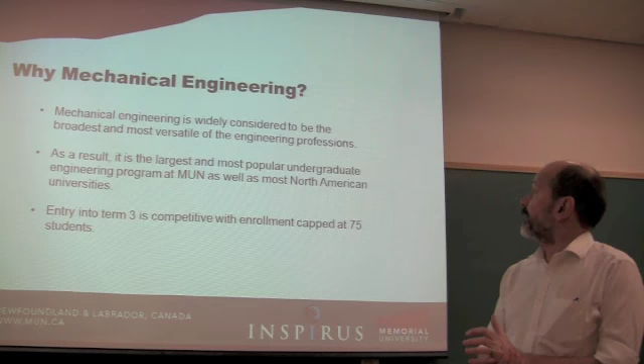So a little bit about mechanical engineering. I think it's a fair statement to say it's usually referred to as the broadest and most versatile program. It covers a number of different areas, and as a result it's the largest program at MUN, the largest engineering program at MUN. It's usually the largest program in most universities, even in the US.

Entrance into term 3, when you complete Engineering 1, is competitive, but we also have the largest cap. We technically cap at 75 students, but usually we go over, so it's about 80 or so. Often the best students come into mechanical - if you look at the top 30 or so, they'll have averages over 80. But because the program is quite large, to get in, it's been sort of in the low 70s, to give you an idea, since somebody's going to ask me that question. But it may change.

So this is what mechanical engineers do, and you'll learn more about this from the various speakers. Again, it's a broad discipline, and a lot of our graduates will work in the energy sector, which is probably the number 1 employer for mechanical engineering students. A lot of the co-ops are in the energy sector, but I'm not necessarily only referring to petroleum and gas - a lot of them will work in renewable energy, wind and hydro, wave.

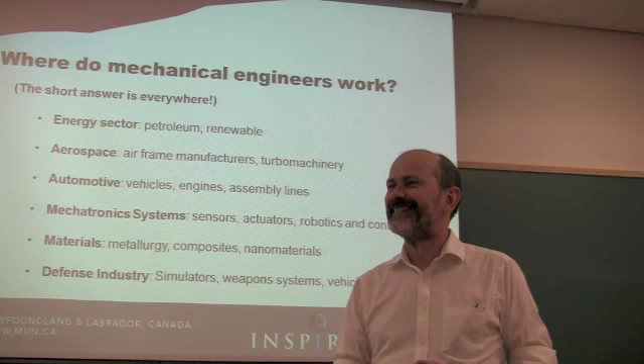So I usually give this really bad joke, so I'll tell you anyway. What's the difference between a civil engineer and a mechanical? Mechanicals design weapons and civils design targets. I didn't say it was very funny - most engineering jokes aren't very funny, by the way.

Manufacturing, so computer-aided manufacturing, production technology.

These are the ones you don't really think of so much, but biomedical engineering, drug delivery systems, biomaterials, biomechanics, prosthetics. We're actually pursuing a biomedical stream for the future with the hospital - you'll learn more about the streams in a minute. We're working a lot already with the orthopedic surgeons, so it'll probably take on a biomechanics flavor, and we've got senior project students currently doing projects with the hospital, mostly in orthopedics.

Marine engineering - if you want to design ships, you go to naval engineering, no question. But if you want to look at the systems on the ship, that's called marine engineering, covering power and propulsion systems, hydraulics, pressure vessel and piping - that tends to be more mechanical engineering. We are talking in the future, maybe with the navals, of doing a marine engineering option, but we haven't gotten too far on that one.

Pharmaceutical and food processing automation kind of go together - there's a lot of production systems and automation systems in that industry. And here's one you don't think about: electronics. In the electronics industry, one of the biggest concerns is thermal management and cooling of electronics, and those are areas in mechanical engineering. You'll take courses in heat transfer, which is really what electronic cooling is about.

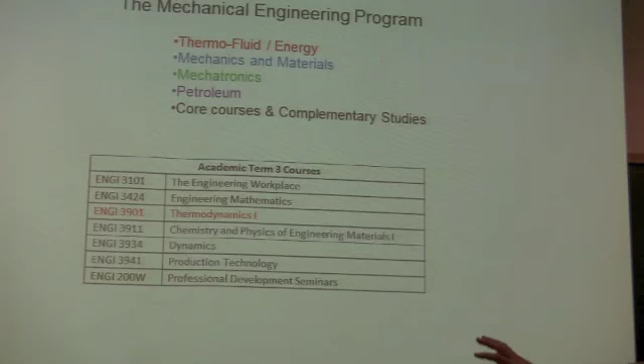Now a little bit about the program. We have 4 themes you'll learn about as you go through the program: thermal, fluid, and energy; mechanics and materials; mechatronics; and petroleum. This is going term by term, and it's color coded - thermal fluids is all the things in red, mechatronics in green, and so on.

In the first few semesters you don't have a lot of choice, you're just following the program. You don't really have a choice except for complementary studies until you get to term 6. If you look at the remaining terms, in term 6 you get your first technical stream elective. You've got 1 technical stream elective in term 6, 2 in term 7, and 3 in term 8.

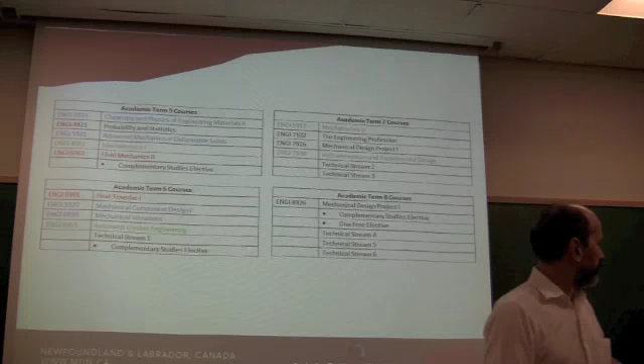We've packaged these technical streams along thematic lines. We have 4 technical streams that we offer, where we basically package your technical electives to gain expertise in a certain specific area. The first one is petroleum - there, the first course you'll take in term 6 is offshore petroleum geology and technology.

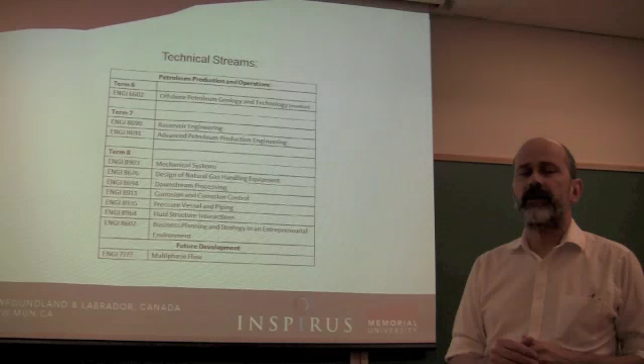Then there's courses like reservoir engineering, advanced petroleum production engineering. Probably the most popular course in this option, which we just introduced with a new faculty member in mechanical engineering, Rocky Taylor, is Arctic offshore engineering. That's probably the most popular elective now - it's got about 50 students in it in term 8.

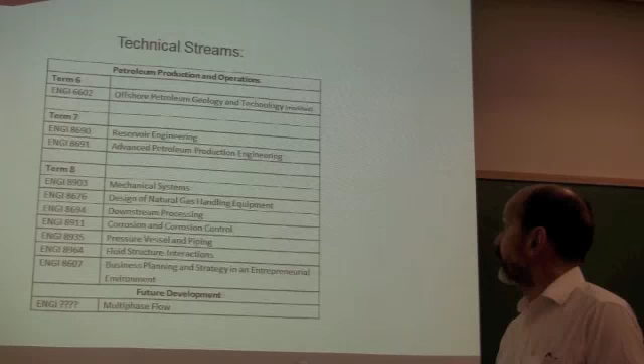Then in term 8 you pick 3 of those electives - things like pressure vessel piping, corrosion, and then some downstream processing, natural gas, etc., mechanical systems. So you can basically mix and match this: it's 1 elective in term 6, 2 in term 7, 3 in term 8.

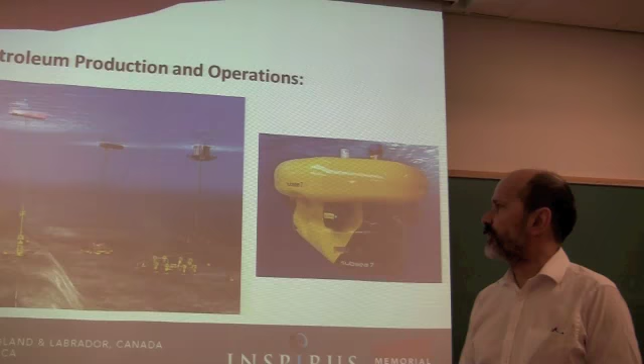The next thematic area - I'm just showing a slide to give you an idea. Anything related to petroleum, I've focused on the mechanical aspects. There's a lot of mechanical hardware and infrastructure on the sea floor now, so that's what I tried to capture here. The other thing you might not think of is there's a lot of automation and robotics now in the offshore - I got a slide from Subsea 7 with their autonomous vehicle.

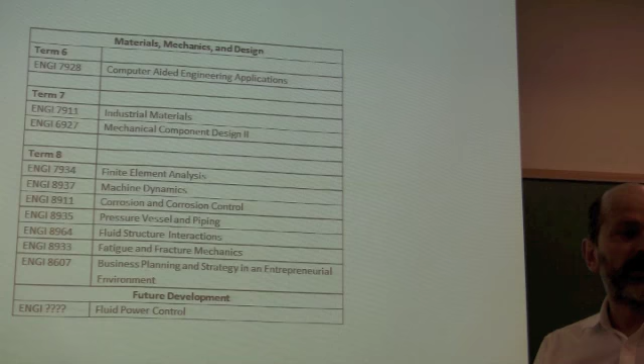Materials, mechanics, and design: in term 6 you'll take computer-aided engineering applications, and then courses like industrial materials, mechanical component design - we're going to introduce welding shortly as well. Then courses in machine dynamics, finite element analysis, and there's some overlap - you see corrosion is here as well, because it does overlap.

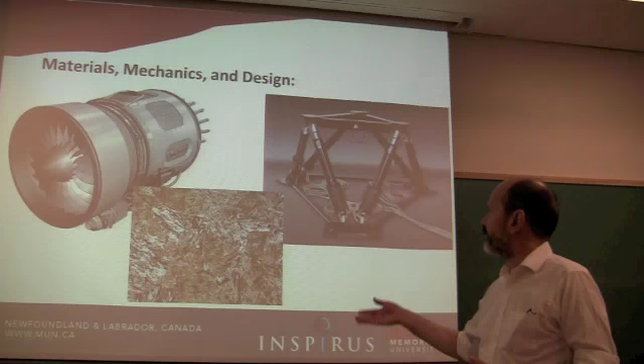This area is very wide, so it could be everything from designing aircraft engines to - this is really a robotic platform, and this is a microstructure. You'll hopefully learn more about that as we go forward.

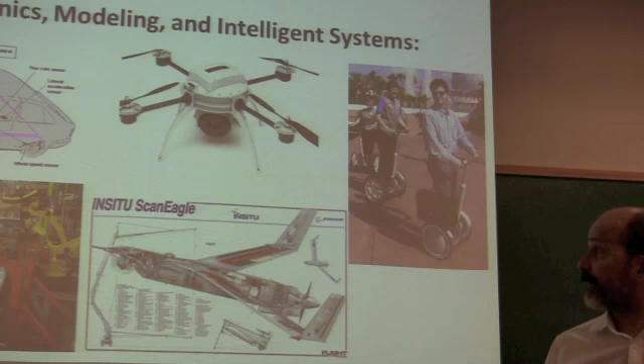Mechatronics includes courses in robotics, component design, maybe machine vision. In term 7 we offer modeling and simulation of dynamic systems, and there's a couple of new courses in the works as well as part of our growth. This area is widespread - I always mention the best example of a mechatronic system is probably a modern car, since everything's computer controlled. But also autonomous vehicles, a couple of examples here, and more traditional robotics.

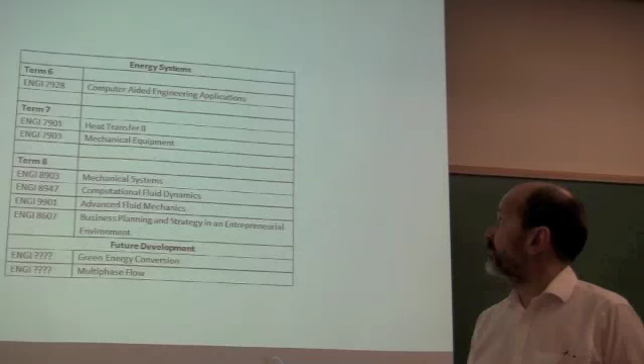And energy systems, so thermal fluids or energy. This we sort of separated out from petroleum. This is more to do with turbines and power generation, so things like heat transfer, mechanical equipment, and computational fluid dynamics. So those are the 4 streams, and you'll learn more about them as we go forward.

So now we're going to really focus on the streams. Happy to talk to you all about my favorite topic, right? Thermal fluids and energy. I find a lot of the time when that term comes up, people look a little bit confused by what it means. And if I ask, do you know what thermal fluids means, the most common response is hot fluids, or hot. So it usually has to do with heat, right? Which is sort of true, but not 100% true.

Thermal more refers to energy overall. Heat is a form of energy, but there's also many more forms of energy. So with thermal fluids and energy engineering, we're looking at all the different ways that you can use energy in its various forms to basically give useful applications for people, which is very important for a number of things.

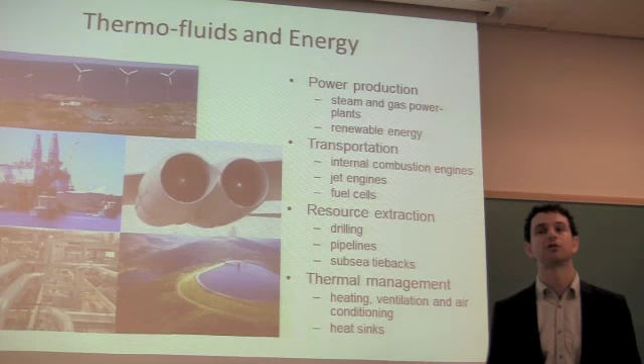Some of the most important, I guess, would be the top one here: power production. Power production, of course, is immensely important to everything to do with our lives. You have one day without power, and it's just chaos, because everything we use is all using power.

So it's very important for us, but it's also very important for addressing issues that are important worldwide. You have problems with food shortages or unclean water. Well, with enough energy, these can also be addressed. You can make fertilizers and improve the soil. You can remove salt from water. You can pump water long distances. These are all applications that involve having enough energy.

So steam and gas power plants are some of the more common ways that we use to produce large amounts of energy worldwide. In Canada, of course, hydroelectric is also very important. And then a growing area, renewable energy, of course, one of my favorites.

So here I sort of have it divided into 4 main areas, but in the time I have, I can't really cover thermal fluids in every aspect of it, right? It's a very broad field. There's many different things that could be investigated. But transportation, of course, is highly integrated with thermal fluids.

Some of the key ones listed there: you've got internal combustion engines everywhere around us. Jet engines, of course, are a very fascinating piece of engineering. Fuel cells—some people might think, well, how is that really a thermal fluid when it's more of an electrochemical process? But there's still lots of issues of thermal management, of bringing the hydrogen or other fuel to the fuel cell, the overall power output. These are all important issues as well.

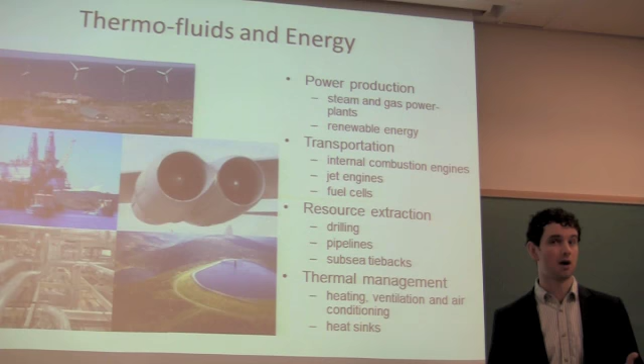On the top picture here, you have some wind turbines, and here in Newfoundland, there's an interesting experimental research installation where they have wind turbines coupled with hydrogen production and a diesel generator for this remote community. So when they're not using all the power from the wind, they produce some hydrogen, and then when they need the power, they use the hydrogen to make power. And this is all just to offset the diesel costs, and the pollution associated with burning it.

And I think this is, to me, a very beautiful looking picture. It's a very simple form of energy storage, which is another important aspect of thermal fluids and energy engineering. In this one, you just have these two reservoirs, and by pumping water to the top reservoir when there's excess power—say at night, when there's excess energy that's not needed—and then when it's needed, say in the peak times of the day, drain it back down. In between you have a reversible pump turbine, so you can get power out when needed.

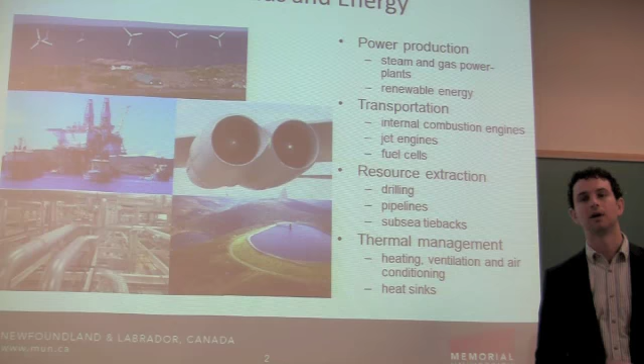So a complicated HVAC system, again, another important aspect.

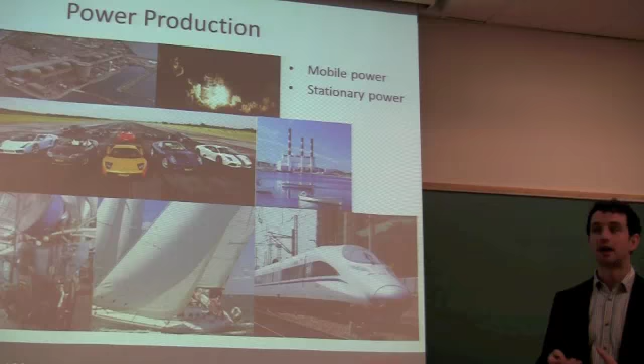And so we have some military vessels here, right? Huge amounts of power needed to move those. So here would be an engine room in a ship - you can see it's a very complicated, large-scale engineering system. You have high-performance automobiles, which you have the engines, of course, but also you have the aerodynamics issues as well that all have to be considered, as well as weight and longevity.

And maybe here we have a more kind of laid-back way of transportation, right, using the energy from the wind. So another thermal fluid application.

So this is probably my favorite area of thermal fluids. I think it's sort of a widespread issue these days that the pollution caused from energy production - between all the cars, the coal power plants, and all this combustion and all the releases into the atmosphere and into the water - people have a lot of concerns. So here are some ways of addressing it.

So I think this is a very interesting building and quite visually pleasing - it's the Bahrain World Trade Center. They have these 3 skywalks here with a wind turbine on each one. So the 2 buildings are sort of shaped like a sail, and they're funneling the wind through the wind turbines in between, creating a lot of power. It's an interesting application of some modern ways of implementing renewable energy systems to offset traditional methods of power production.

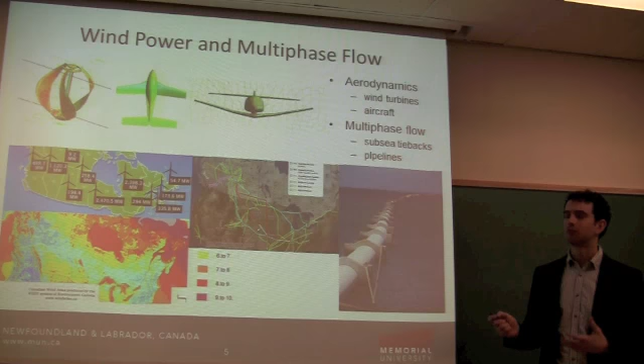It's also changing direction a lot, which gives a lot of implications - all the rain, all the ice. These are all areas that need to be improved to really optimize the wind energy potential in Newfoundland. So these are the areas I'm looking at, trying to research, trying to put wind turbines for these remote communities, which are currently using diesel generation, and ways that you can store energy from the wind to use it when needed, since the wind isn't necessarily blowing when you want the power produced.

I've also done a little bit of research on this airplane, which I thought was interesting to show. It's supposed to be a seaplane that can land on water, that's why the wing is at the bottom. By removing the pontoons, you improve the aerodynamic efficiency, and it's also supposed to handle better on the water. So it has implications in improving the lift while limiting the drag, which are more thermal fluid applications.

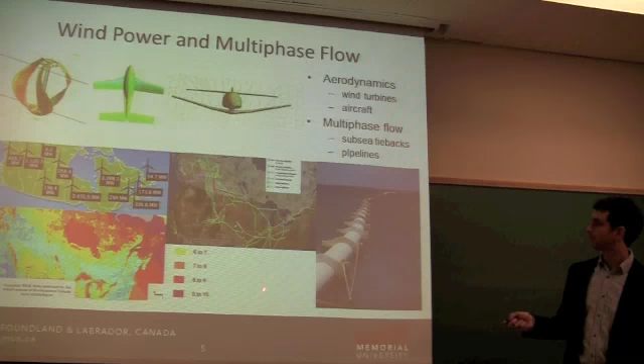And then pipelines, multi-phase flows. Here's just some pipelines in North America - you can see it's a pretty intricate network, and these are only for oil and gas. There are more pipelines if you want to look at other commodities. And this pipeline here is not actually for oil and gas - this one is in Hawaii, and it uses the temperature difference as you go vertically in the ocean to produce energy.

So that's sort of my other area of research, looking at the multi-phase flows of these different systems and trying to optimize the movement and characterize the physiochemical processes involved. I hope some of you find this area interesting, and if you do, I encourage you to look at thermal fluids and energy systems.

So next up is Professor Sam Nakhla, who's going to give a bit of an overview about solid mechanics.

Solid mechanics is simply when you want to build something, you've got to make sure that it's going to take the weight, take the load, take the thermal stresses, take the vibrations. So you make sure the design is comfortable in terms of dimensions, in terms of everything, and that it's going to be safe to use.

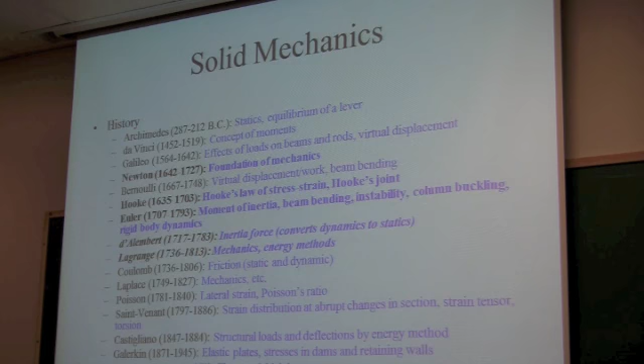So let's go ahead and see how it all started. It started with Archimedes in the beginning, and it ended with the microstructure, but you can see a whole lot of famous names in between. We're not going to go too much into history now - we invited Tommy Pickles to help us with some application here.

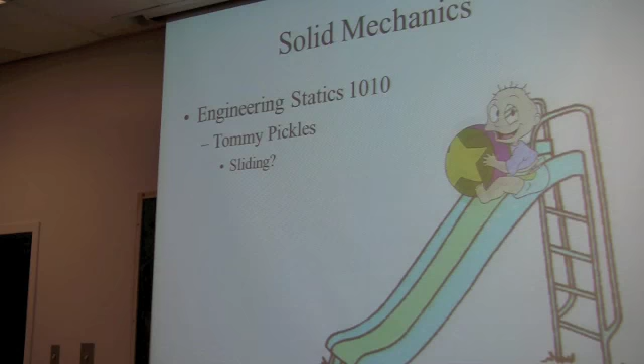A simple design, a design of a slide. Let's say you want to design that slide. First of all, how will sliding take place - you studied that in 1010, or you're about to. Simply, will he bounce down or tumble down, or from equilibrium equations, will he simply slide like that. So you know how the load is going to be acting on the slide, which is the structure. This is the first unknown in a set of unknowns.

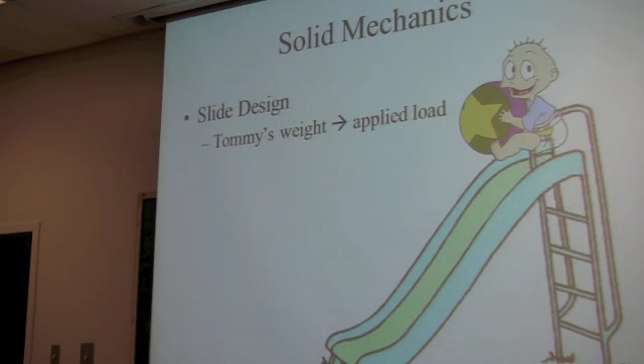And now when you go for the slide design, you know you have the applied load, whether Tommy is a tiny guy or a much bigger guy, and the manner in which he slides. The objective of the design is that the slide is not going to deform too much under Tommy's weight, because that would be dangerous for Tommy, and it's not going to break while Tommy is sliding. So this is just a simple application.

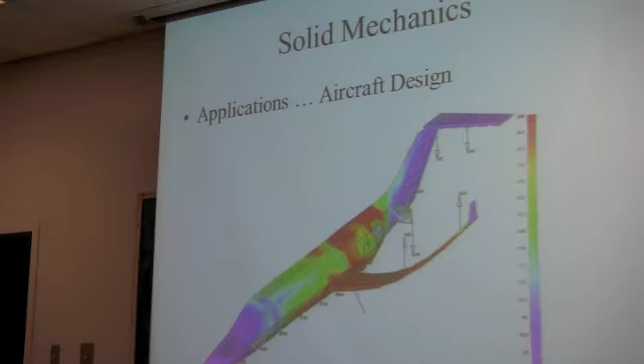But we don't design slides in mechanical engineering - we do much more sophisticated stuff. We design an aircraft from thermal fluids: we get the air loads, the heating that takes place in the boundary layer, and we design the stresses based on that. Other applications are engines, like an internal combustion engine, or parts of an engine like a turbine blade. All these things are mainly about materials and loading in terms of temperature or air loads, and we come up with a design in terms of solid mechanics.

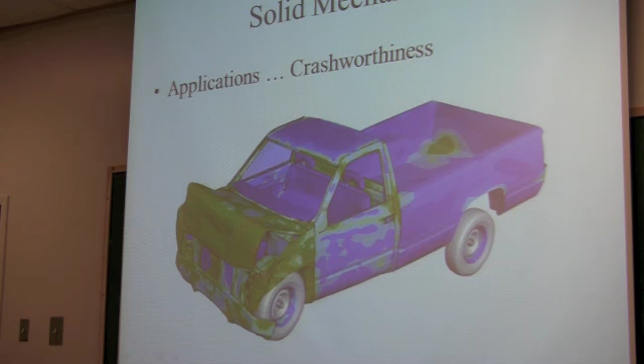Or we do crash worthiness for cars. So instead of putting somebody in a car and experimenting with hitting it with a wall, we do a simulation, and through that simulation we're able to get an idea about the crash worthiness of a new car.

Here are some applications of what I do. Normally, I do composite materials, but solid mechanics is a widespread field, so it goes everywhere.

Composite materials, we start by these tiny panels here. These tiny panels have some aspect to it which is very peculiar. They have two shapes. You know, like you have to see it. If you're coming to the open house, you're going to see it. So how to use piezoelectric actuators to make them pop from one shape to another.

And then how to build a morphing wing for a tiny aircraft, an uninhabited aerial vehicle. So this was one application.

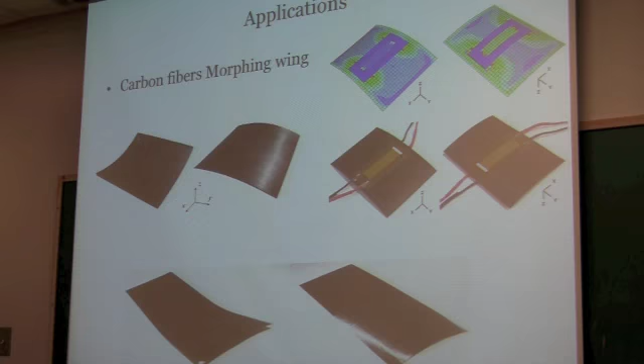One more application, which was a parametric design of the fan stage, just the fan stage of an engine. Simply, if you know the engine requirements, you plug in the numbers, and in CATIA it would show exactly, right away, pop up. CATIA is a CAD system, by the way, computer-aided design. It's going to pop up the design, a visualization of the design that you may want to adopt.

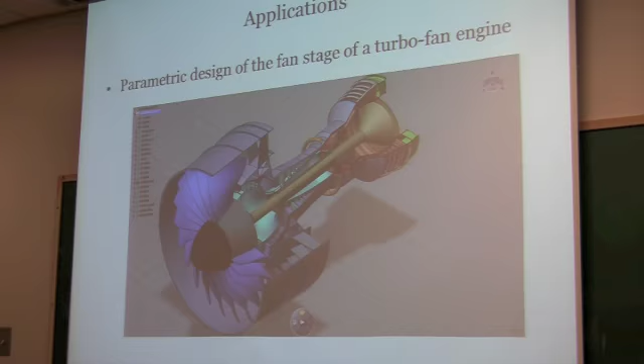And then I conclude, mechanical engineering, the profession of intelligent people. Welcome to Memorial. Thank you.

So I don't know how many of you know Jeff Rideout. You might have had him in engineering, maybe not. He hasn't taught engineering one in a while, but he'll be talking about system dynamics, mechanics.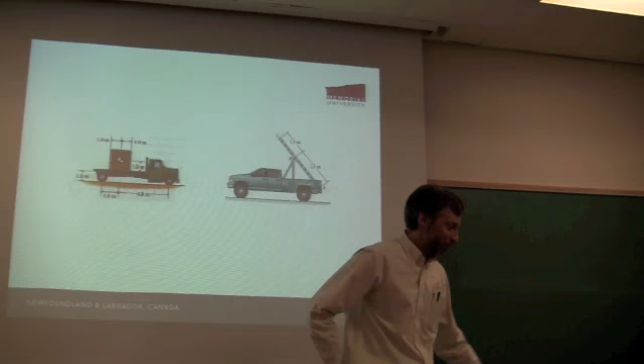All right, thanks, Nick. So I'm going to be first talking about really the first dynamics course you'll do in the fall, which is an extension of statics, except now the sum of the forces is not 0, it's MA. But that turns out to be a lot more challenging than people realize. This is the course where people say, I get all the other courses, but dynamics is blowing my mind.

So, well, while your mind's being blown, you'll be aware that you're learning some very useful and interesting things about how the world works. Here are a couple of typical dynamics problems which I plucked out of the book because they're in my area of interest, which is vehicle dynamics.

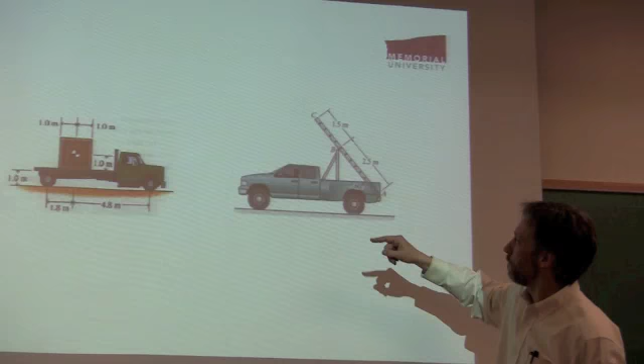If you've got a ladder propped up in the back of this pickup truck, how fast can you accelerate before that ladder starts to tip back over the tailgate and crashes down onto the lane behind you?

In this problem, we ask, how fast can the truck accelerate with this crate on the back? So let me put the question to you first of all. What are some things that might happen if you accelerate too fast?

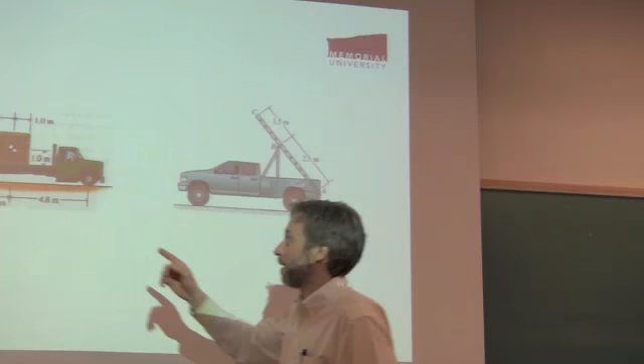The crate could fall off, right? So it could slip off. So here's an example where in statics, your equilibrium condition could not be maintained. There's not enough static friction to maintain equilibrium.

What else could happen? That could be bad. The crate, if the crate doesn't slip, what else might it do? If this was a refrigerator, what might it do instead of slipping? It might tip over. Okay, so there's dire consequence B.

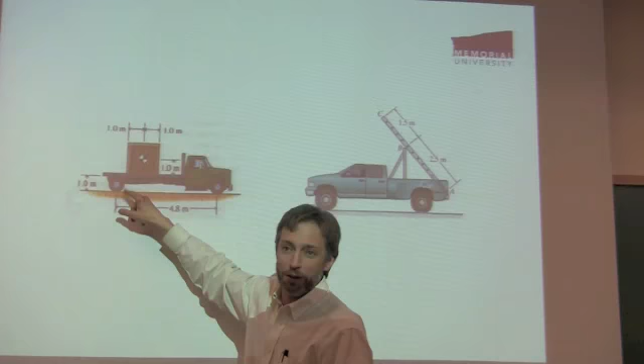If you accelerate too fast, maybe the rear tires break loose. You can accelerate the fastest if you keep your tires rolling without slip. You keep them in the static friction zone, because we know static friction forces are higher than kinetic friction forces.

The truck may do a wheelie. Unlikely, but it's one of those things that could happen.

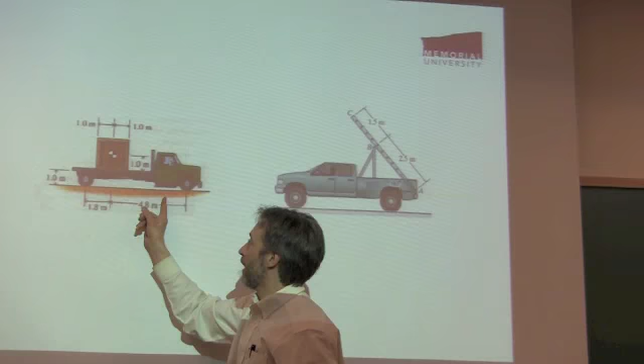So to analyze this, you need to apply Newton's laws. Sum of the forces equals MA. Sum of the moments about the center of gravity of the truck and the crate equals inertia times angular acceleration. That's the new wrinkle that dynamics brings. Dynamics is first of all a study of motion, how to mathematically describe motion, and then how to figure out what forces are causing that motion.

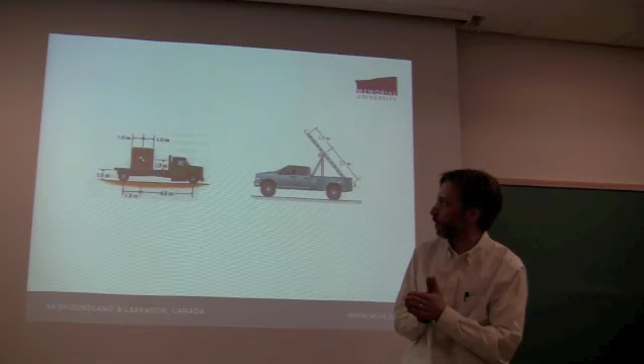Do you think it makes sense—this is a trick question, but someone take the bait anyway—do you think it makes sense to model a vehicle as a particle with negligible size and no rotation, or to model the truck as a rigid body where the size and shape matters?

What does your gut tell you? Anybody? Anybody? Rigid body. That makes sense.

It sort of depends. And now I'm going to get into system modeling. When you're trying to predict something with computer simulation, you need a model of the system. Sometimes a really simple model is useful—it gives you a rough answer very quickly. A complicated model gives you a better answer, but it may take days.

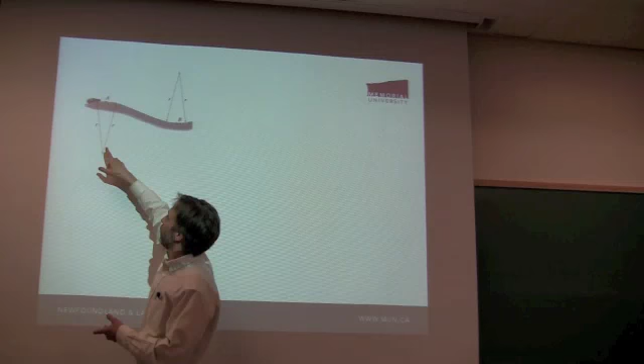If you want to know how fast this car can go up over the hill before the tires lift off the ground, it doesn't really matter how long the car is, what the wheelbase is. You're concerned with the normal acceleration—how much speed can you carry into this curve and still keep your tires on the ground?

Now, if this is Tommy Pickles going down the slide—okay, let's say it's you in the car—when you hit the valley, what do you feel? The car goes down in the dip and comes up at really high speed.

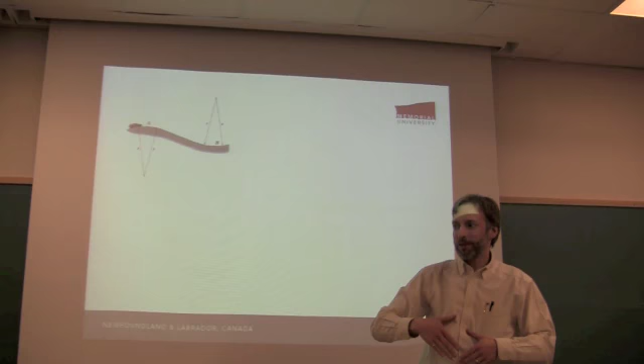You feel your heart going down, right? And here you feel your stomach coming up in your throat. That's all because you're being accelerated. The loads on you are different, and now the loads on the road are also different.

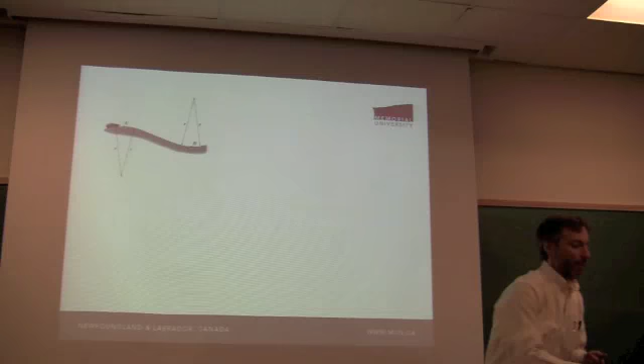When Tommy Pickles goes down the slide, his acceleration is going to change the forces on the slide. So it's actually deceptively difficult to figure out where the peak loads on that slide are going to occur. If you have a moderate load in the middle, you'll get a certain deflection. If you have a higher load at the bottom, you may get less deflection, and you may get more. So dynamics and solid mechanics are intertwined.

If you want to predict how fast you can go into a decreasing radius turn, again, modeling the car as a particle is fine. But when you dig a little deeper, the amount of cornering force that the tires can generate to keep you on that curve depends on, well, the steering angle for one thing.

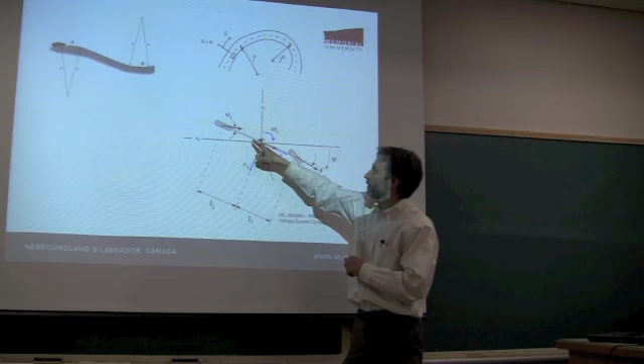So to get more precise results, now we start thinking of the car as a rigid body. If we want to predict not just that the car spins out, but exactly how fast the yaw angle builds up, now we need a more complicated rigid body model. So we get into that in the second half of dynamics.

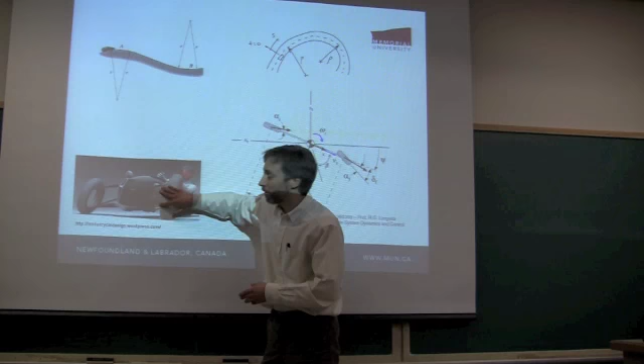We also move then into mechanisms in term 4, where we predict how the angle of these tires is going to change as the suspension deflects. And you can design suspension mechanisms that allow the vehicle to lean into the turn.

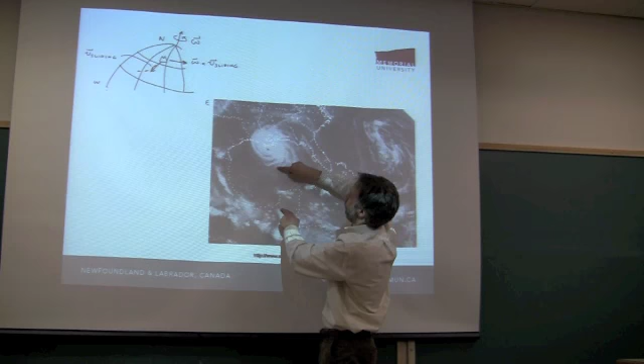You also learn interesting things about how the world works. For example, Coriolis effects—this is a dynamic acceleration related principle which explains why if high pressure air goes into a low pressure zone in the northern hemisphere, air coming up from the south goes this way, air coming down from the north goes that way, and you get this cyclonic hurricane effect. An iceberg that is pushed due south from the North Pole is actually going to drift westward because of the rotation of the Earth. So we learned how to talk about that mathematically.

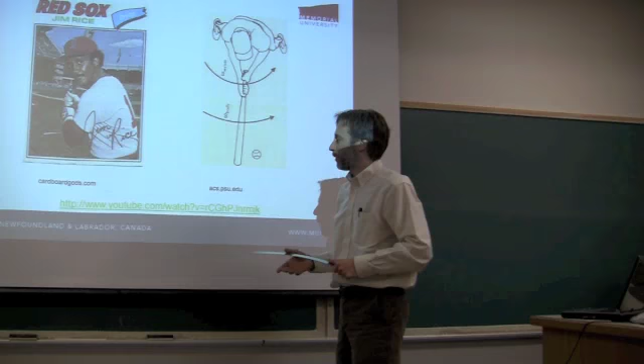If there are any baseball fans here, maybe your dad or mom will tell you about Jim Rice. He was one of the strongest, we believe non-steroid enhanced, baseball players ever. Three times in his career, he broke his bat, not by hitting the ball, but just by stopping his swing. He stopped his swing so quickly that the bat actually snapped off.

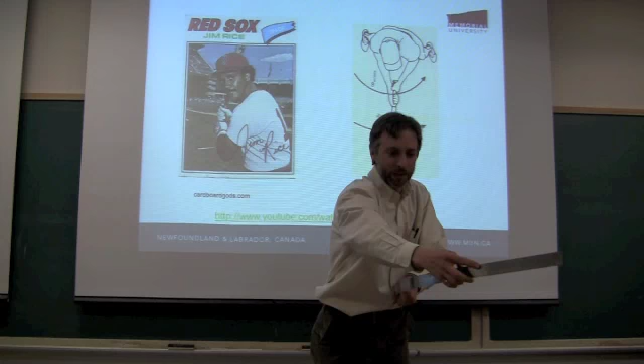The bat has some mass out here, and if he's got that bat going at full speed and he stops it, that mass wants to keep going. In something deformable like this, you can see the bending stresses that build up.

We talk about those sorts of inertial forces. We can predict how much of a notch would have to be in a bat for it to snap if you tried to check his swing. That ties into solid mechanics. We can calculate where the sweet spot of the bat is, where when he hits it, he doesn't feel his hands being jerked one way or the other.

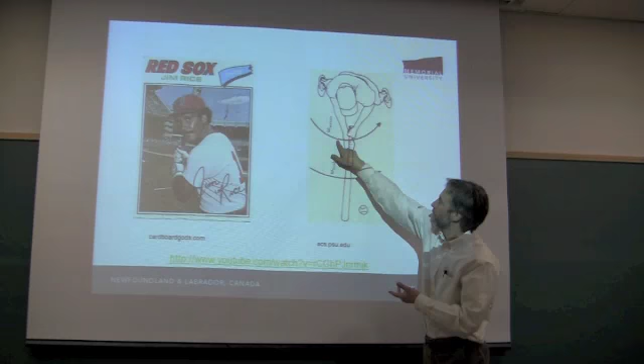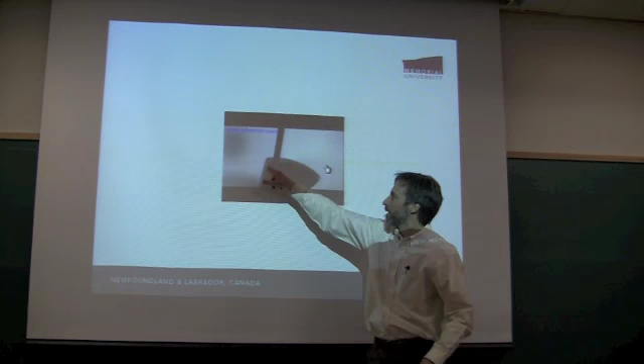If you know how far a golf ball travels, its initial angle coming off the club, and how long the club head contacted the ball, then you can estimate the impulsive force on the club. That's useful, and you just saw some deformable mechanics going on there with that golf ball. Again, all dynamics and mechanics.

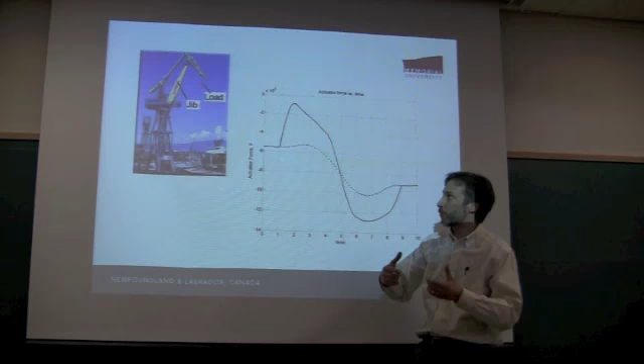If you see a picture of a big container yard, they have these level luffing cranes. If you size these links and locate their endpoints properly, you can extend the crane and move a load horizontally, over the deck of the ship. If you just consider the weight of the load, here's the force required in the hydraulic cylinders that move that crane. If you consider the inertial dynamic forces from speeding up and slowing down these links, dynamic forces are often in design either omitted or underestimated, but they're usually critical. So dynamics is essential if you want to do design.

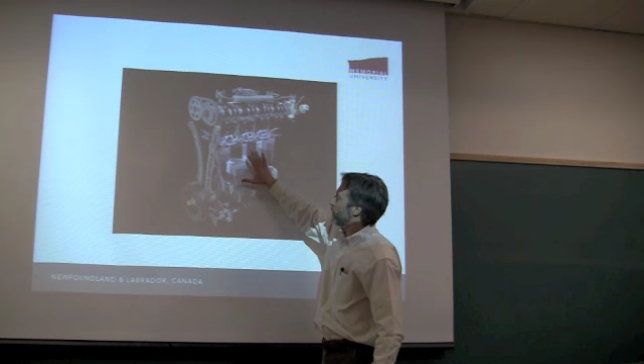In my Term 8 engine dynamics course, we talk about engine shaking forces, which engine types are smoother than others, where to put balance shafts to smooth out vibration, how to determine how big they are, and exactly where to put them.

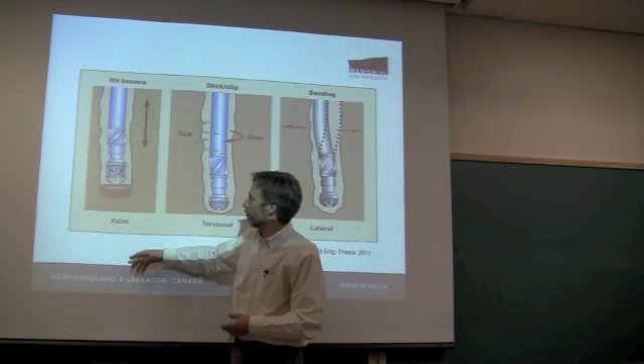In my research, I do a bit of vehicle dynamics research. I also do vibration of oil well drill strings. Even though these drill strings are made of rugged-looking steel pipe, they actually bend and vibrate in a number of different ways. There's a course on vibrations where you learn about axial, torsional, or bending vibrations. All of these occur simultaneously in oil well drilling, which makes it an interesting research area.

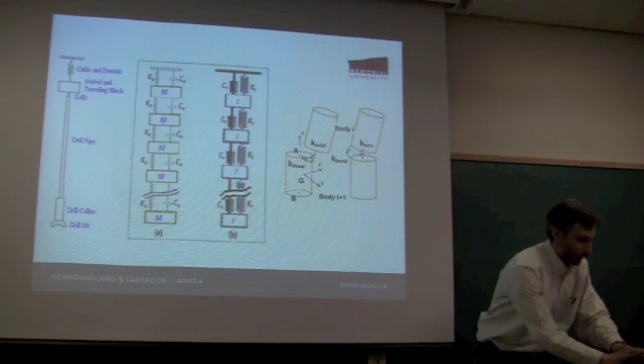We have ways of simplifying the dynamics of the big, long, continuous pipe. We can actually use a lot of Term 3 theory and Term 6 theory to predict the onset of vibration in an oil well. There's an unbalance down near the bit, and if we spin the drill string up - these drill strings are several kilometers long - we'll see some vibration building up in the center of one of the long spans.

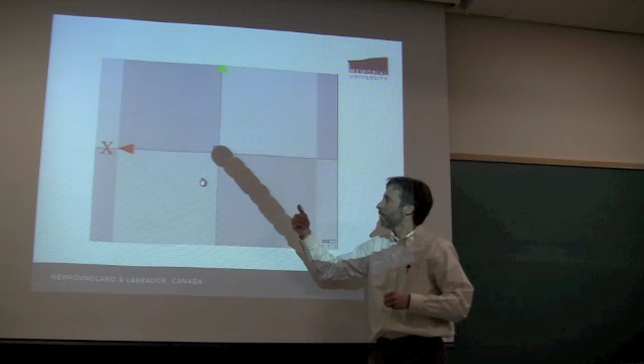So we get a lot of bending vibration. After a while, the drill string starts to snake its way around the hole - it starts to whirl. Predicting this vibration is essential for predicting when the tools that allow you to steer the drill string need to not be subjected to excessive forces. So you need to understand how the drill string vibrates. With these models, we can predict when stick slip occurs in the drill string, when the bit actually slams up and down off the bottom of the hole.

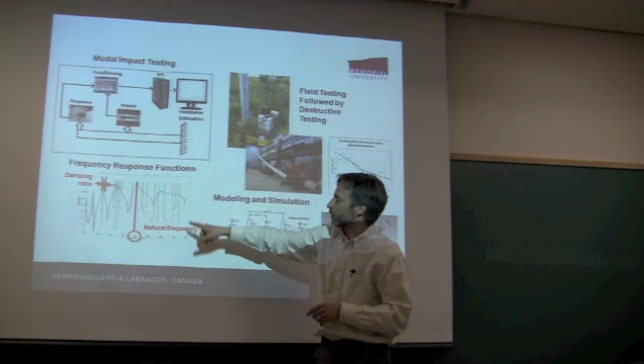My other research area is trying to predict the strength of wooden hydro poles. We take poles in the field, we hit them with a sledgehammer, we measure their response. From the vibration response, we can figure out the natural frequencies at which it wants to vibrate, and we can figure out how much damping there is in the system, how quickly those vibrations go away.

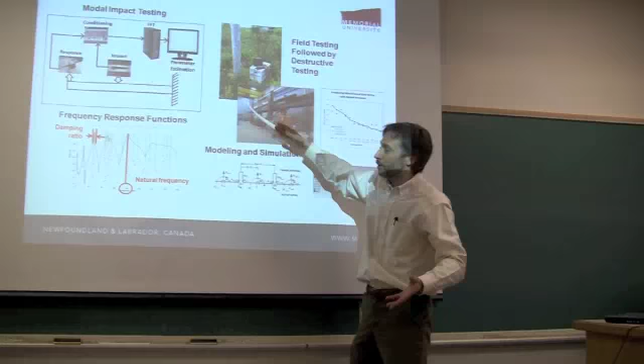You think of a diving board as vibrating at this kind of low frequency, but there's lots of other complicated vibrations going on as well - low frequency vibration like this, and high frequency vibration on top of it. By measuring all those different vibration modes of a pole, we can actually predict its strength. So here we need dynamics, vibrations, solid mechanics, modeling, finite element, and simpler models. There's dynamics, mechanics, and vibrations - lots to talk about. Hopefully we'll see you guys in the fall.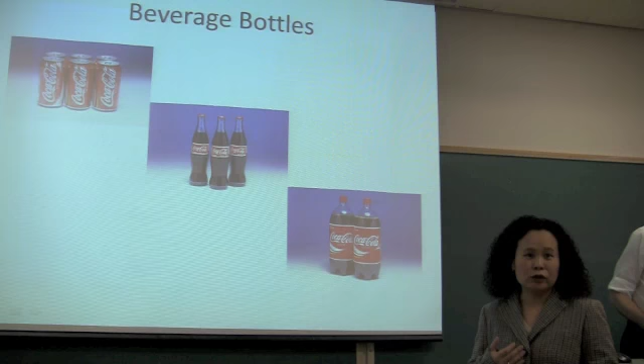Besides materials, what do you see? What kind of materials are there? More specifically, you see plastic, glass, a tin can, right? And then you see the different shapes. And you also see that perhaps there are different shapes and different materials for different reasons, for performance, whether it's a single serving for lots of people, or for keeping it cold better, longer, etc. And maybe even how this beverage container will be recycled or not.

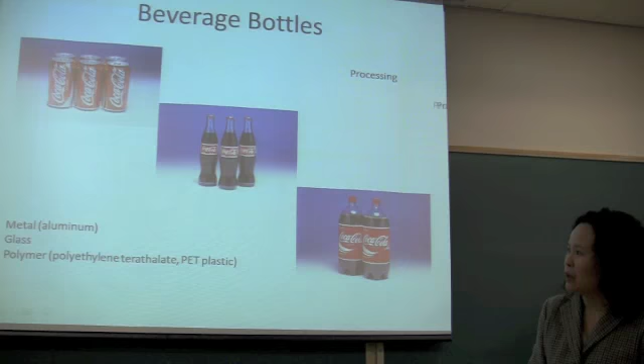So if you go on to the next slide, you see here metals, glass, polyethylene, polymer, PET plastic. And if you go on to the next slide, you see that material science is all about these four things: processing, structure, properties, and performance.

I purposely put performance on the bottom because normally as engineers we put it at the very top. That's our end goal, to make sure the materials perform as they want to. But in order for the materials to perform as we want, we have to look at the microstructure, how we make it, the processing, and also the properties - the structure and also the mechanical properties, the thermal properties, magnetic properties, materials properties.

So I like to put it as a steering wheel so that whatever we're interested in as an engineer, we just turn it around. If we're most interested in processing, we look at that. If we're most interested in analyzing the mechanical properties, we look at that. Of course, keeping in mind that the end result is that the material performs very well.

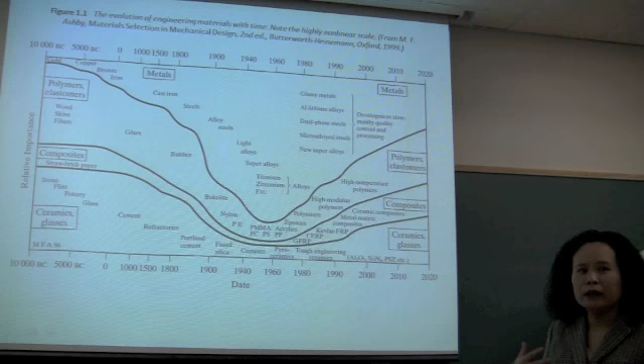Next slide. This is a busy slide, but it just shows that we've been using materials since the dawn of mankind. You can look at wood and skins and stone - earth sciences would be interested in looking at materials of that sort. But as engineers and mechanical engineers, we're interested in metals, modern day materials, how they're formed, how they're made, and how we get the properties that we want from modern materials: metals, polymers, composites, ceramics, glasses, etc.

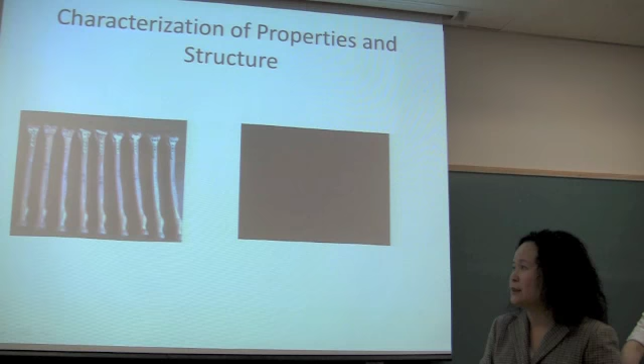So next slide. Another example is something that I do here, biomechanical testing. And what's inherent here is materials application. If you look at that, those are not real bones, but they're sawbones. So they have the same properties or density as if it's your wrist bone.

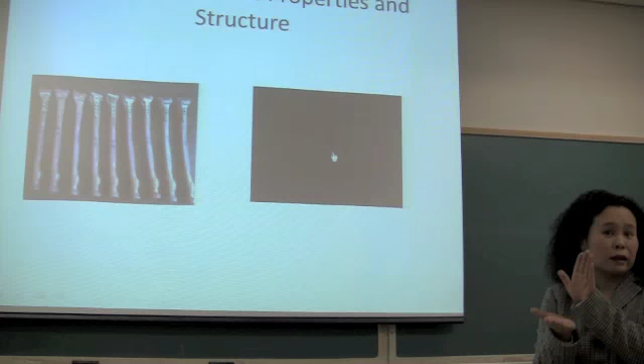I'm pointing to this wrist bone because we're looking at wrist bone fractures. You see there's little cuts at the top of each bone, and there are different plates. So we're looking at the design of the plates, the choice of material, and how well they'll withstand cyclic loading - mechanical properties, materials, and design. I won't show the video for time, but if you're interested, come find me and I can show you that test in lab.

That ties into what Dr. Rideout was saying about the bat. He was talking about forces, but all I could think of was what kind of material that bat was made of, and what were its properties. Or the golf ball - what material made it withstand those kinds of forces and stresses? That's another example of materials science.

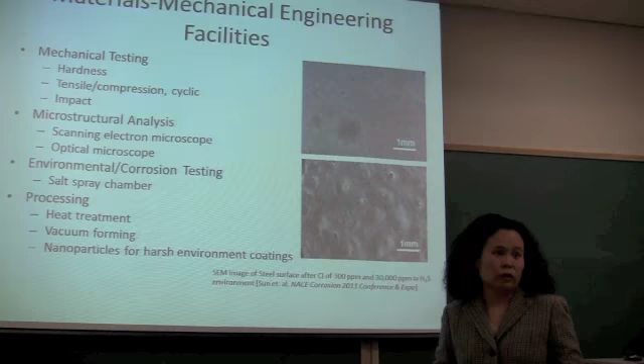Last but not least, a lot of the work I do here, because of where we are, is in corrosion - materials corrosion testing and microstructural characterization. There are quite a number of projects I work on related to corrosion. On the right you see microstructure pictures of steel after exposure to chlorine, highly acidic environments. You see blistering, a type of corrosion occurring more in the bottom image versus the top, which had less exposure to parts per million of chlorine.

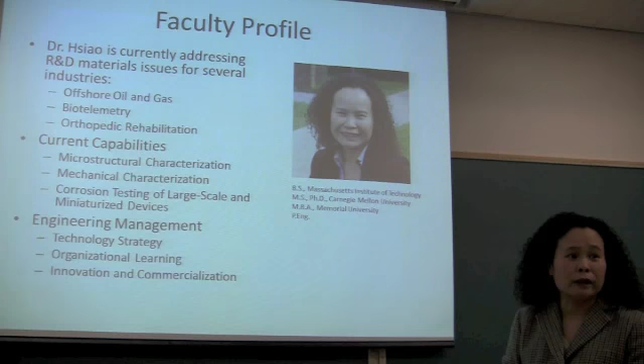So, next slide, to sum everything up - I shouldn't put that photo there because you can see me right here - but all the things I do here and that you'll study as a mechanical engineer: offshore oil and gas, biomechanical testing, orthopedic rehabilitation in particular, corrosion, mechanical characterization, microstructural characterization.

As a side note, I also wear a different hat besides materials engineering - I look after the Master of Engineering Management program. There's interest from engineering students who may want to pursue an MBA or leadership and management, and that's also what I look after.

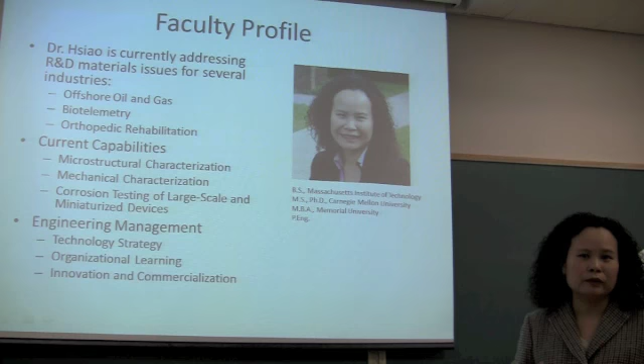If you have any questions, please feel free to stop by my office or send me an email. I can talk to you about material science and how it applies to mechanical engineering.

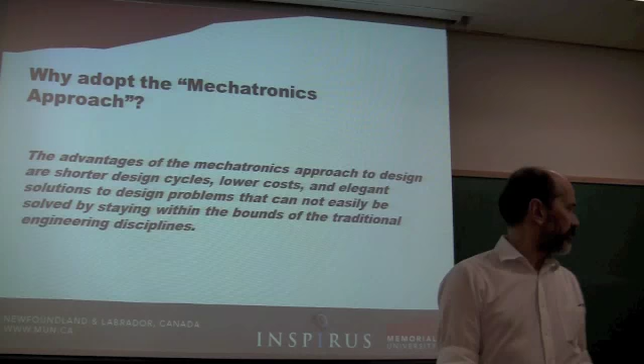So I've got a few examples. One is aerial robotics. It's clearly a mechatronic sort of device or system because you've got to worry about the solid mechanics aspects, the control aspects, the aerodynamics, the fluid mechanics. So this is actually a relatively good example.

Let me show you a couple of videos of these quadrotors. This was at a conference I just went to. These guys in Zurich do all kinds of wacky things with them, but this is balancing an inverted pendulum on a quadrotor. I won't let it go too long, just until it gets to the next part. Then it goes in a circle and balances it and all this kind of stuff.

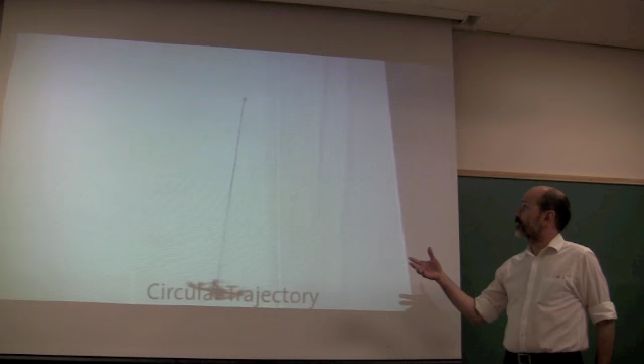So there's all kinds of vision systems involved to track where it is. They're controlling the quadrotor, with a lot of prediction as to which way the mass is going. A lot of dynamics, actually, similar to what Jeff was talking about.

All right. If this works, hopefully.

This is something you get to do in term. I showed you the balancing pendulum - this is in the second mechatronics course in term 7. This is one of the exercises that students do. It's not on a quadrotor, but it's the same idea. You'll get the idea here.

So these students had a bit of an artistic streak to them. Fundamentally, it's the same problem that you saw. But if you look at what's involved, there's the mechanics, a ball screw driving the table back and forth. There's sensors that keep track of where the pendulum is, and a processor that's controlling it in order to balance. Anyway, that's something you might do.

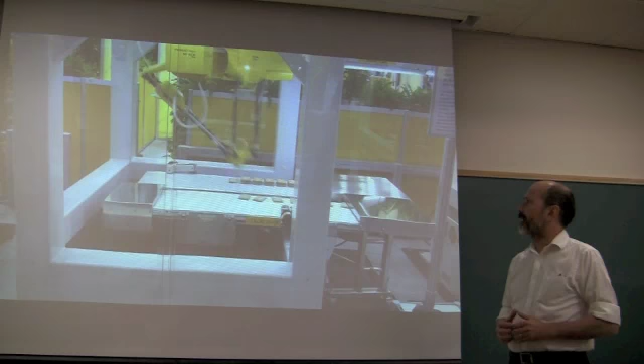Another mechatronics example is in high-speed robotics. These are Delta robots, at a conference I went to recently in Japan. So for high-speed automation and material handling.

This one I've shown in class a few times. This is Big Dog, if you've seen it, from a company called Boston Dynamics. It's now bought by Google, actually - Google owns this company. When I first showed this video to Tom Pike, who some of you know in the lab, he was sure it was two guys in a suit. But it's not - it's actually electrohydraulic, with a lot of sensor systems. It uses hydraulics to power it.

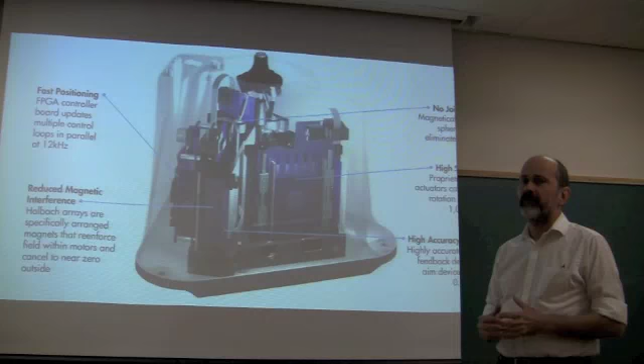This is a little bit about what I do - I'm going to end with this one. I work on intelligent sensor systems for autonomous vehicles, and this will just give you a brief overview. One of the things we develop is a very precise, high-speed pointing device for tracking objects.

This falls in the area of optomechatronics, as it's called. Here you'll see the device - it's a kind of parallel robot, and that's really how it moves. There's a camera on top that tracks moving targets in real time. This was us setting up for a conference where we were demoing some of it.

I think I'm going to stop there so I can take any questions you might have, and feel free to ask anybody almost anything.

No, actually none of that ever appears on the transcript. Even when we had the offshore oil and gas option, it never appears in the transcript. I don't think it's really overly important, because the way our streams are set up, you can actually pick courses between them.

We don't really mind. Ultimately, when you go to try to land a job, they're not going to look at the fine print of your transcript. You've got to make the case for what you know, where you worked, what you did, which courses you took. So I think that's really the value. None of the streams appear in the transcript for any of the disciplines.